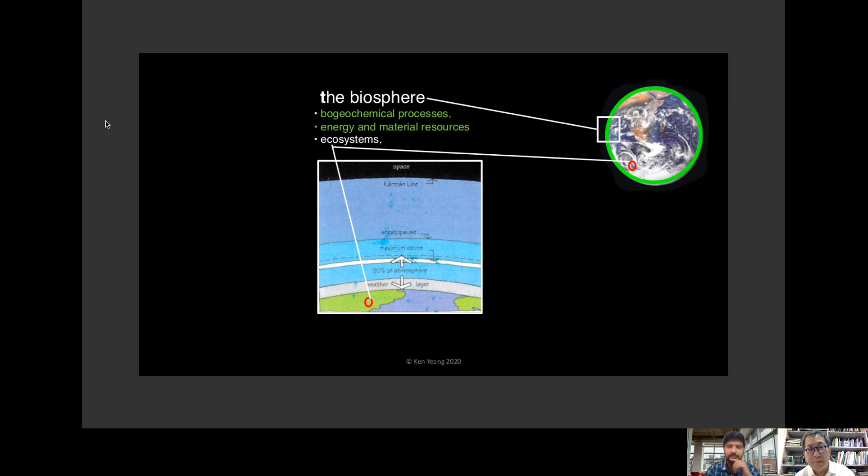Ecology sees the Earth as covered by a thin film called the biosphere. Within the biosphere are ecosystems, which are units in nature. The ecosystem consists of communities of plants and animals and the physical environment - so the community of plants, animals, and microbes.

And then the physical environment is a site characterized by given climatic factors and features, and its geology and its edaphic factors, or its soil. So the ecosystem consists of biological constituents and physical constituents acting together to form a whole.

Now, within the biotic constituents are human beings and our communities. And then there is the physical environment of which we make things - this is our built environment. As human beings, and as one of the species in nature, we make more things than any other species in nature. We will cover almost, at least a significant portion, of the planet with our built environment.

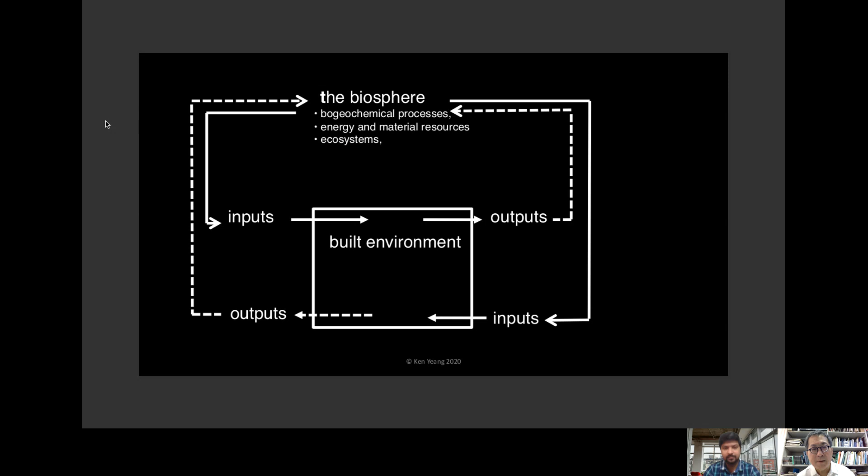If you look at it more comprehensively, inputs consist of energy, water, materials, food, and people, as well as their transportation. The built environment has impact when they make it, an impact when you use it, and an impact at the end of its useful life. Outputs are energy, emissions, materials, waste, people, and the built system itself. And now everything goes into the biosphere.

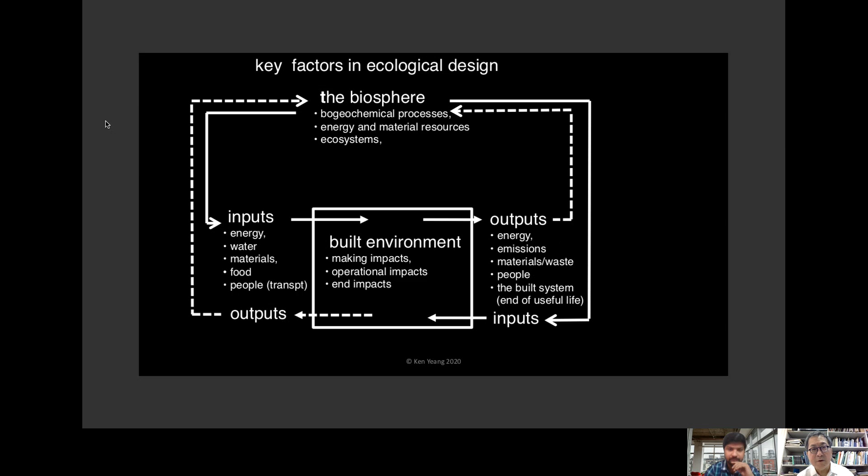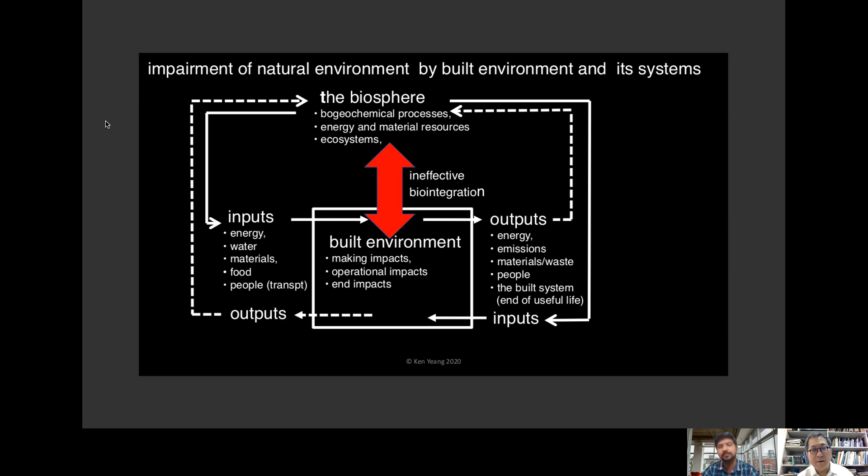It is the ineffective integration of our built environment with the biosphere that's the cause of the current state of environmental impairment. Because of this, for example, the gases we emit from the production of energy go into the air and pollute it; they're not integrated into the atmosphere, and this is the cause of pollution.

In many ways, I see what we do as architects similar to what doctors do in the design of prosthetic devices. A prosthetic device is an artificial object, like an arm, a heart, a leg, a kneecap, or even an eye, which is attached to a host organism. The success of the prosthetic device depends entirely on effective biointegration.

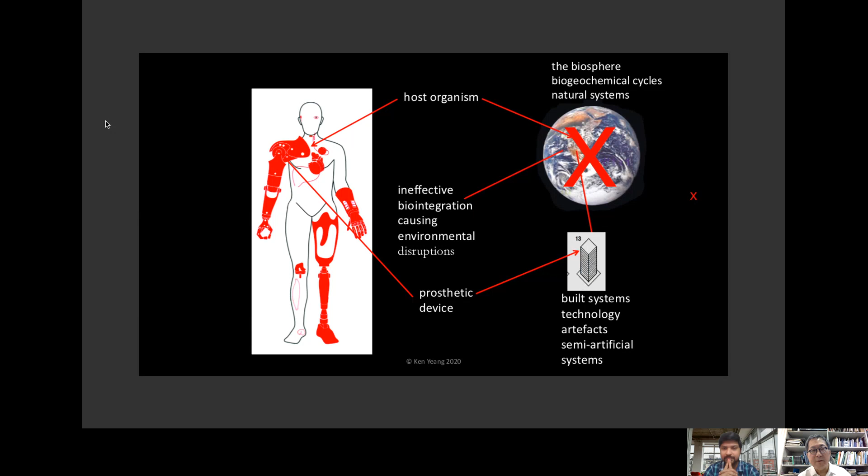If we draw the analogy, our built systems and technology artifacts are prosthetic devices because they're human-made, artificial, synthetic. Our equivalent host organism is the biosphere, its biogeochemical cycles and natural systems. So everything depends on effective biointegration. If the biointegration is ineffective, that's the cause of environmental disruption. So in one single diagram, that's a summary of what we're trying to do: effectively biointegrate our built environment with the natural environment in a seamless and benign way.

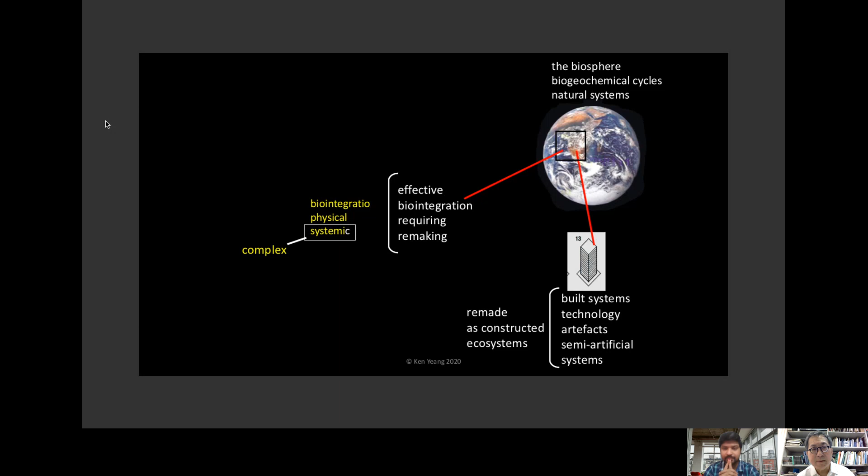Now, what does this mean? Biointegration, to me, has two aspects. One is physical and systemic. Physical biointegration is simple—it's just placing it and joining it together. But systemic is the more complex one.

So what I'm trying to do in our work is see whether we can create hybrid ecosystems by imitating and emulating the attributes of ecosystems. One of the first things we try to do is list down the ecosystem attributes that we need to emulate and replicate.

The ecosystem attributes include biological structure, biodiversity in ecosystems, connectivity in ecosystems, the provision of ecosystem services, biointegration in ecosystems. Ecosystems respond to climate, use and recycle materials, produce pure water and bring it back to the ground. The species are symbiotic, there's homeostasis—a feedback system within the ecosystem—and ecosystems produce their own food and succeed over a period of time.

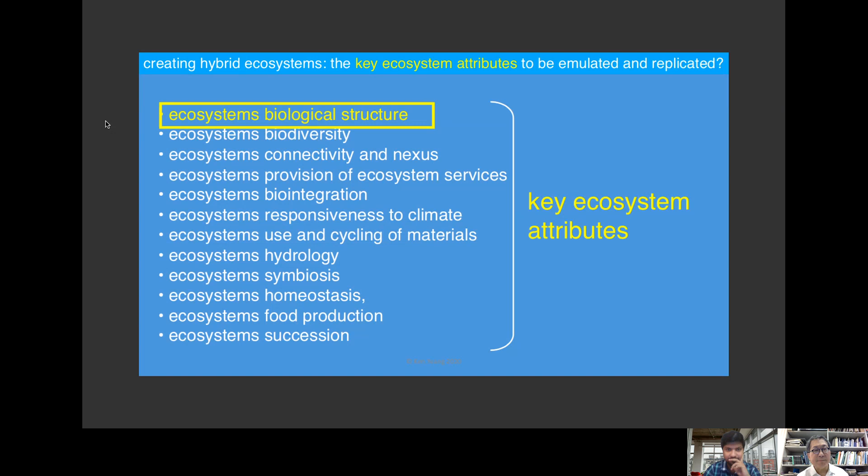So our work starts with how we can emulate and replicate these attributes. The first thing we did was look at ecosystem biological structure. This was the diagram I showed earlier, that the ecosystem consists of biotic and abiotic constituents.

But what you find if you look around you in Mumbai, for example, is that the environment and buildings you're in are mostly abiotic—it's hard, it's masonry, it's concrete. So where are the biotic constituents? This is what differentiates our built environment from ecosystems in nature, because nature has a complement of both biotic and abiotic.

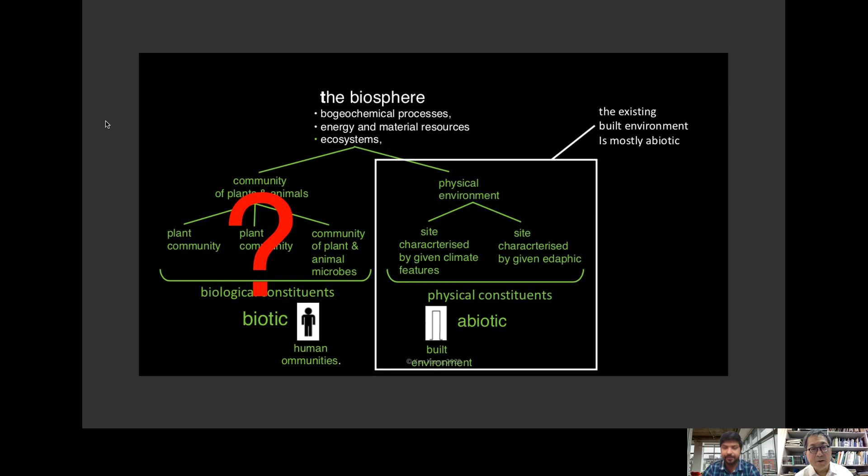This is a very important factor, because once you consider it, if you want your buildings to be like ecosystems, they should have their complement of biotic constituents. So our work starts with: how can we bring biotic constituents into the built environment?

I've done four diagrams here. The first is to put it all in one location, as you can see in Central Park. You can have a spotty relationship, as in the second diagram, as in Georgian London, where you have a series of green squares—Euston Square, Bedford Square, Tavistock Square, Russell Square, and so forth. Or you can have a stepping stone relationship.

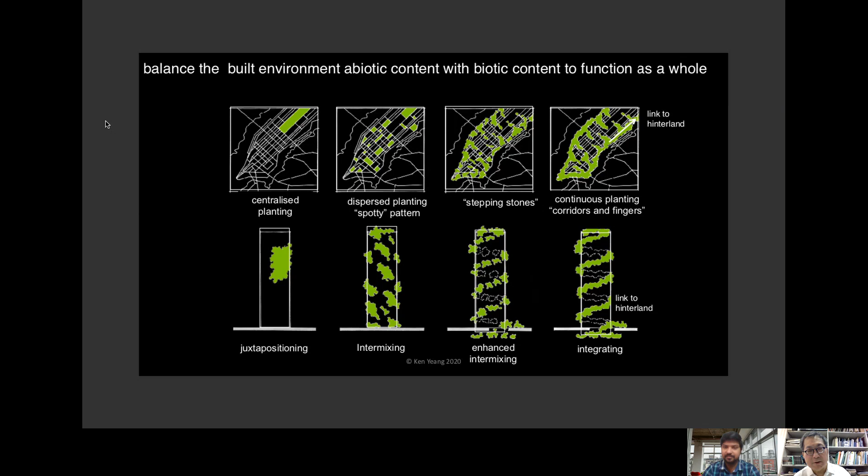That means you have green patches close to each other, like a stepping stone, but not exactly connected. The last diagram is the preferred one, because all the green areas are connected—I have green corridors and green fingers that eat into the built environment. By being continuous, this enables species migration and species interaction. By being connected, you have a greater pool of natural resources shared among species. So in ecological design, this is the preferred pattern: continuous planting.

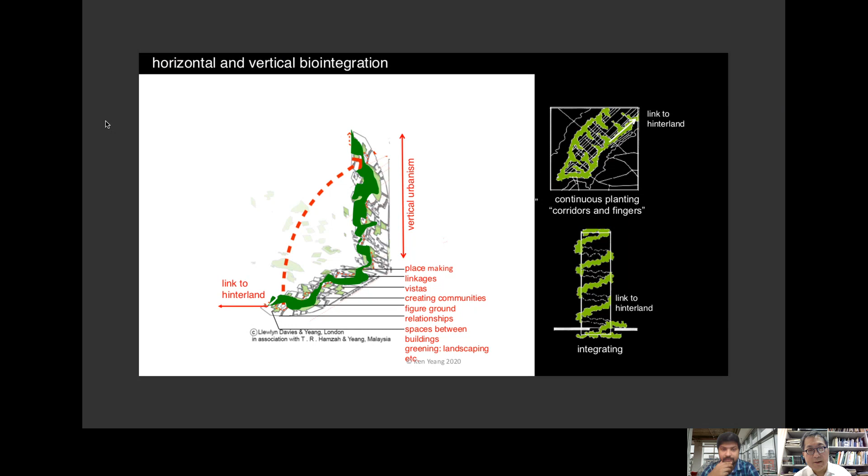Now, continuous planting is not just at the ground plane. We should try to link it as much as possible, but we should link from the ground vertically into the built system, like this. So this is my idea of the green city—it starts with biointegration of biotic constituents, the greenery, with the abiotic, the physical environment.

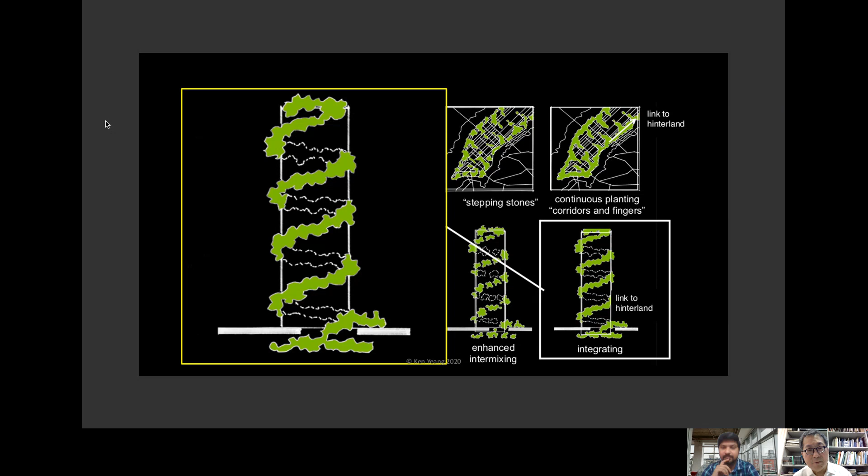This must be done carefully—not just using any species. The species must not be invasive, because invasive species could affect the ecology of the locality. So I started to experiment with this and see how we can bring it into the building, not just in a sporadic fashion, but bring it all the way down to the ground and to the basement as well, as much as we can.

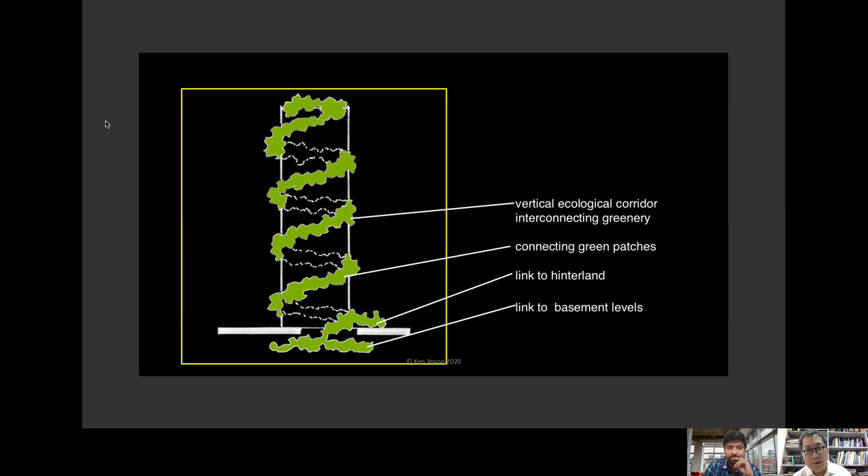And so these are the key factors in balancing the biotic with the abiotic: vertical ecological corridors, interconnected greenery, connecting green patches within the city and green within the building, which we link to the hinterland and we link to the basement levels.

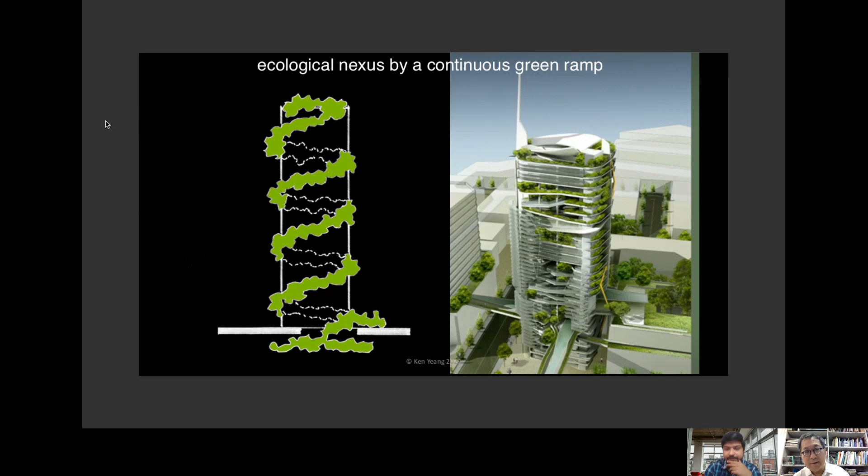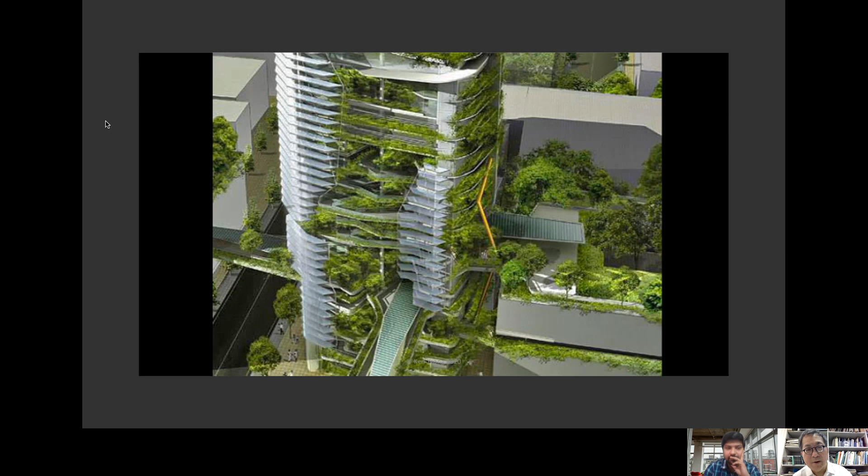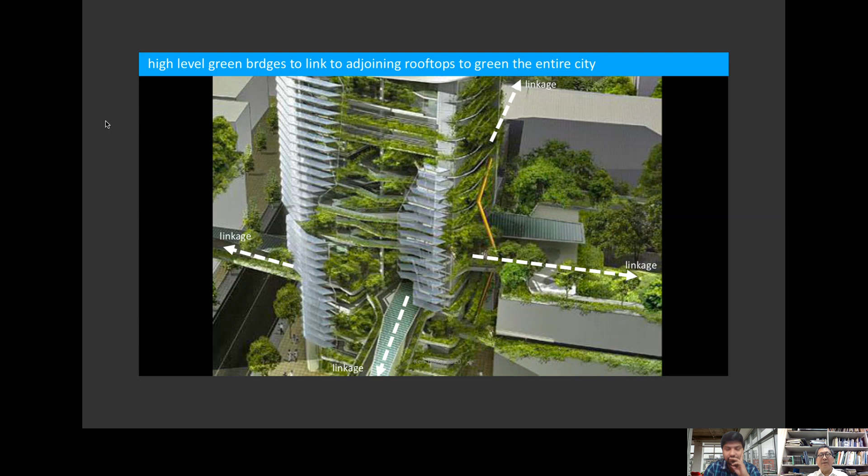The idea was that whenever the greenery reaches the same level as the adjoining building and the roof level, we should try and bridge across it and then extend the greenery into the roof. So in this way, our building becomes a catalyst, a device for slowly greening the entire city. This is just an idea that we had for doing it.

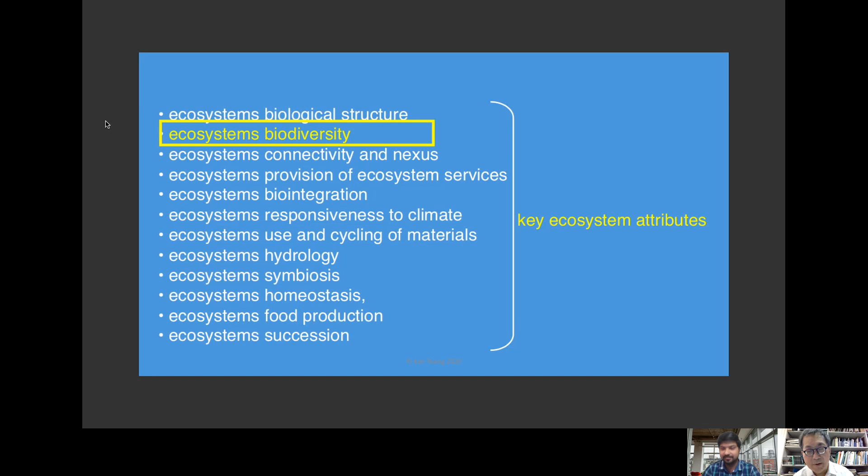Now, the next ecosystem attribute is ecosystem biodiversity. Ecosystems don't consist of just one species. If you look into the building and room that you're in, all you have is yourself, human beings, as the primary species, and then the other species are the rats and the creatures and the cockroaches and the microbiotic life in the environment that you're in. Now, how do you enhance the biodiversity?

Our approach is to see that whenever we design, we try and create habitats within the built environment at the ground plane. The habitats could be, as you can see on the right-hand side, green roofs, vertical greening, green sky courts, green atriums, a constructed wetland, detention ponds, bioswales and green areas on the ground. And then there should be green links to the hinterland, and also, when it goes down to the ground, we call it the Ecocell.

This building was completed about 3 years ago, and it's quite a big building. It was basically 2 buildings, which are almost symmetrical, and they lie in between. There's a boulevard, linked in an axis from the plaza at the north all the way down to the monument on the south. So the second bar that you can see, the upper diagrams, are the different areas where we create habitats: the ground plane, the terraces, the walls, and so forth.

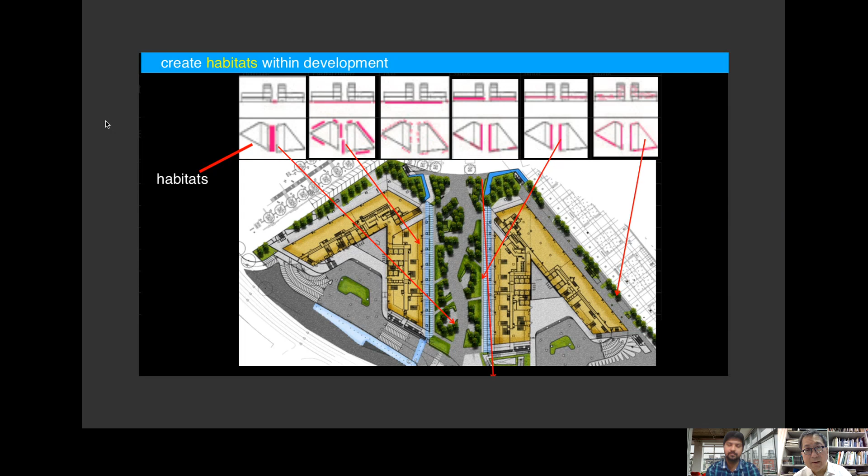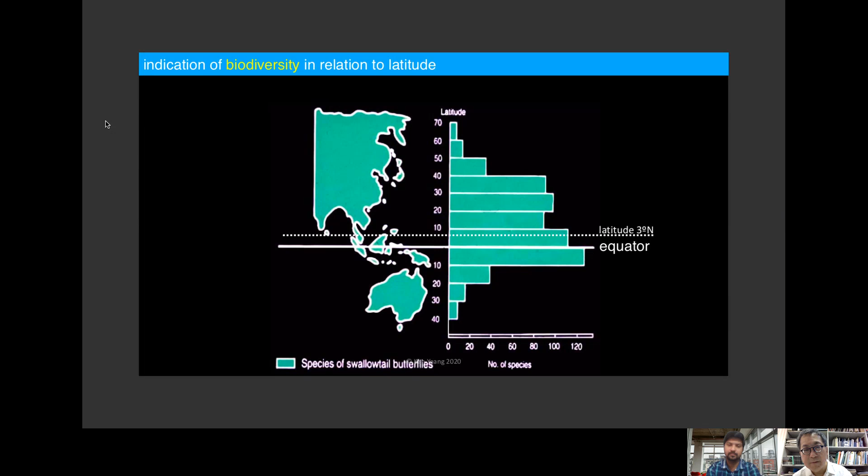Having established habitats in our design, we start to look at the biodiversity, and this site is about 3 degrees above the equator. As you can see, it's fairly biodiverse. We started to prepare what we call a biodiversity matrix, which is this matrix on the left-hand side. On the first column, we have the species that we want to bring back into locality, species of fauna that we want to bring back.

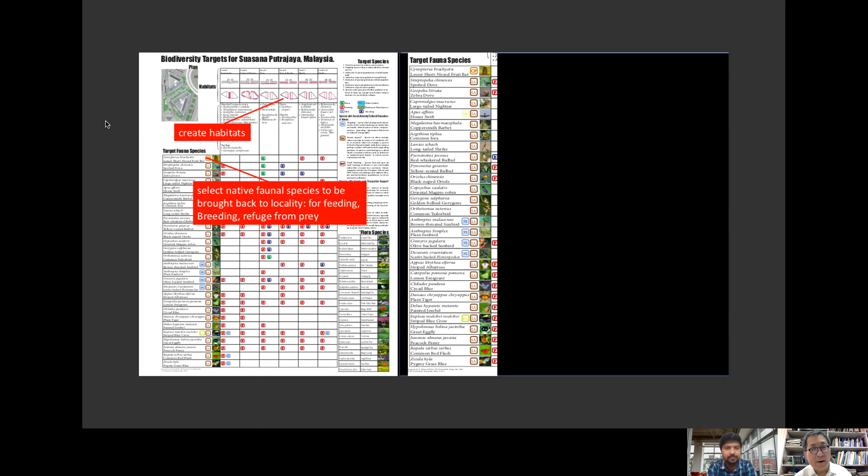And then the top bar are the habitats, and we see how they interact with each other, whether it's for feeding or breeding or for refuge from prey. Then from there, we identify floral species that will attract the fauna. So what we have is a matrix of habitats, flora, and fauna. We use this as a basis of designing the landscaping and the habitats for the development, so the whole development then becomes a biodiverse development, where we try and balance the biotic with the abiotic.

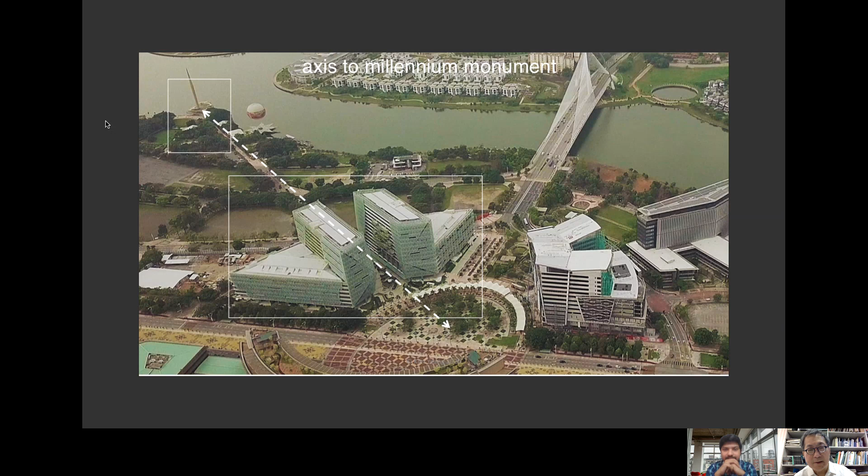So you can see the 2 V-shaped buildings, and they sit on this piece of land, which is about 3 acres, between the plaza in the center, and then going down on the far left to the monument by the waterfront, which is also designed by us. In the middle is the bridge, and the right-hand side leads to Prime Minister's residence. Here it is, you can see the 2 buildings, and you can see the square and the monument, which is on the right-hand side, next to opposite the Ministry of Finance buildings.

This is the space in between the 2 buildings. It's a seating area for people. We intend to make this into a space which is a lively place for people. And then off this, below the towers, are canopy spaces which we hope to have restaurants and bars and food and beverage outlets.

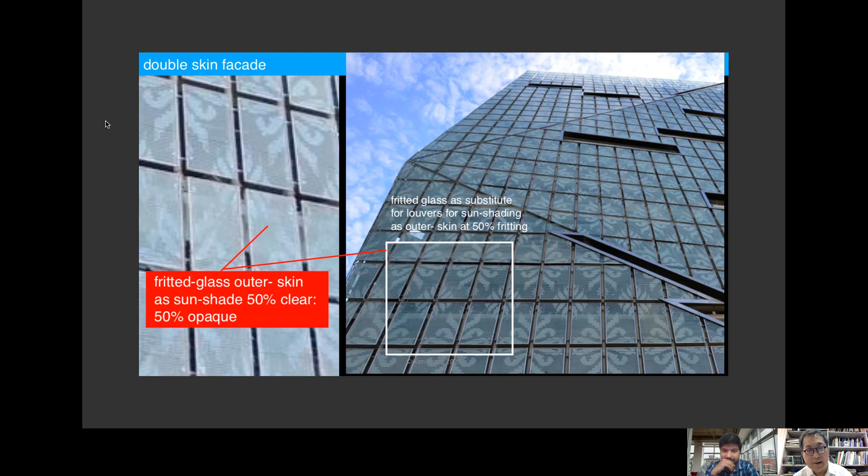What is unique about this building is this double skin. The conventional way of treating sun shading is to have horizontal louvers, but we wanted to do something besides that, so we experimented with fritted glass, which has a fritted pattern on it. It's not exactly butt jointed, it's spaced a little further apart, and the fritting is about 50%. There are two skins, an outer skin and an inner skin.

We wanted to see how effective it is as sun shading. The building energy intensity is 136.18 kilowatt hours per square meter per annum, whereas a typical office building uses 210 kilowatt hours per square meter per annum. So by all means and purposes, this is an effective, low energy building. These figures show that the fritted glass and sun shading works.

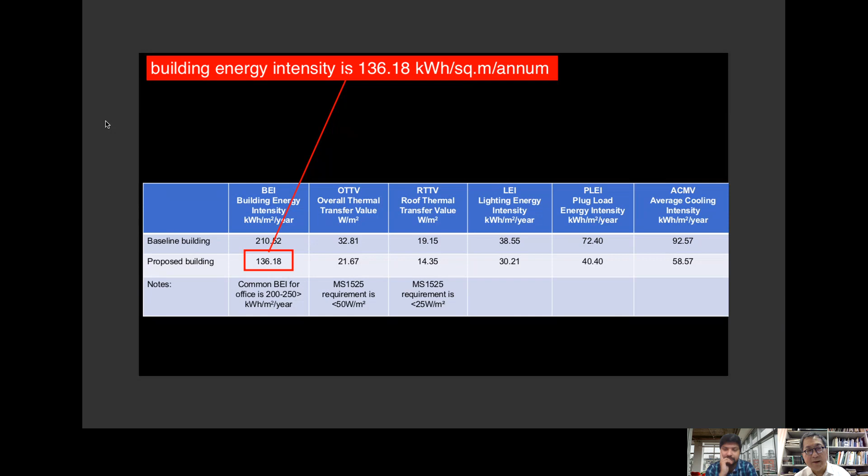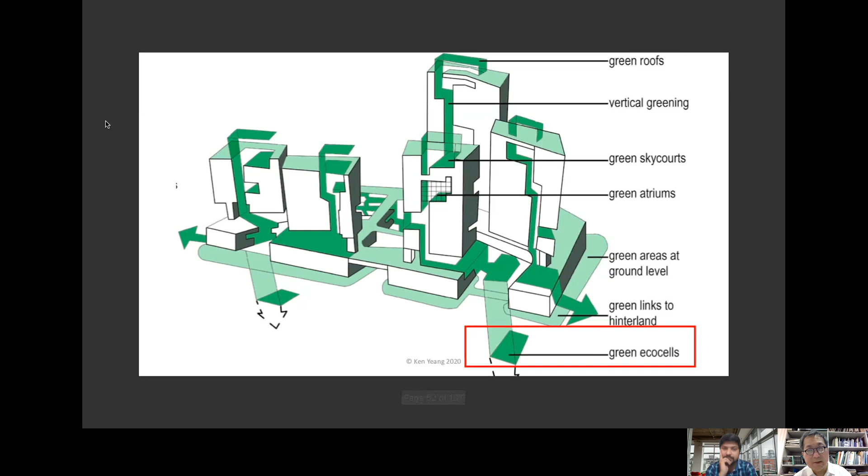This time we brought all the greenery all the way down to the basement, and we call this an Ecocell. This is the master plan we did a few years back for the Kowloon waterfront, with Ecocells on the podium that cut all the way down into the basement. It provides vertical integration for the greenery, opportunities for rainwater harvesting, brings natural ventilation and daylight into the lower areas, and you can have an eco machine at the bottom, or a bioswale, used for treating sewage and waste. So I call this an Ecocell.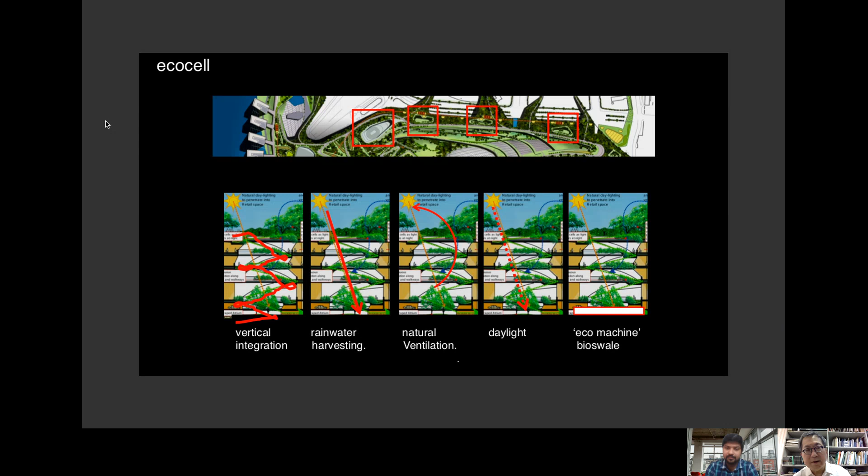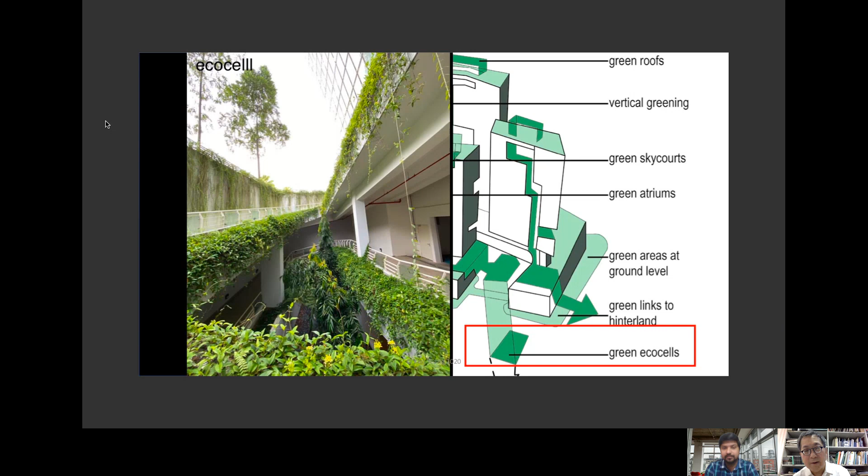This is the device we have in the buildings. For this particular project, you can see the planting going all the way around from the third level, spiraling all down to the ground and down to the basement. This is the Ecocell.

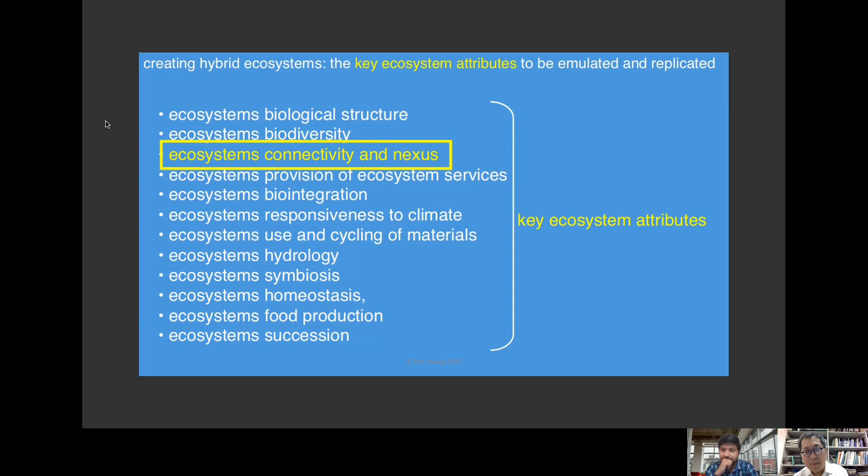Nature is totally interconnected, and sometimes not just physically, but also by the air and the water, even though these are not immediately apparent to all of us. One of the things we try to do is reconnect nature, because what human beings do is fragment nature - whenever we go on a site, we cut it up with roads, drains and sewerage, and we should try to reconnect it.

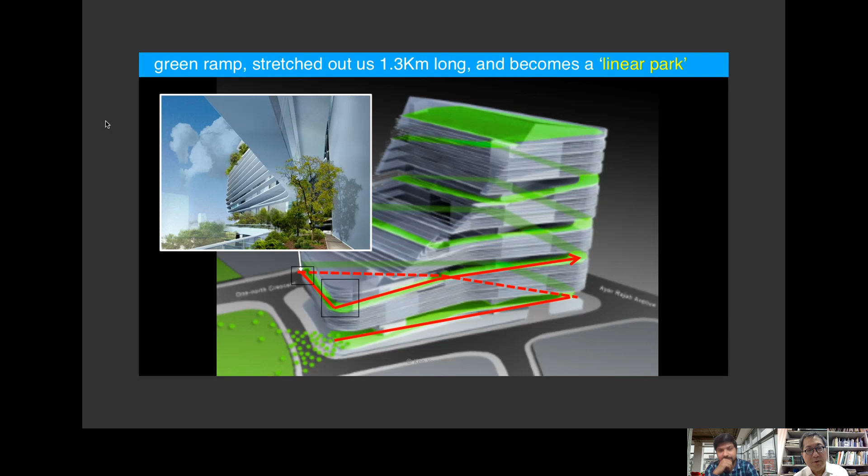In this scheme, we try to reconnect the green areas in this building by this ramp. On the left-hand side is the inspirational drawing showing the greenery following the ramp all the way up. Next to it we have a walkway, which enables you to service the greenery without going through the building. This is a detail of what it looks like - you can see the walkway, the vegetation on the left-hand side, and the sun shading on top.

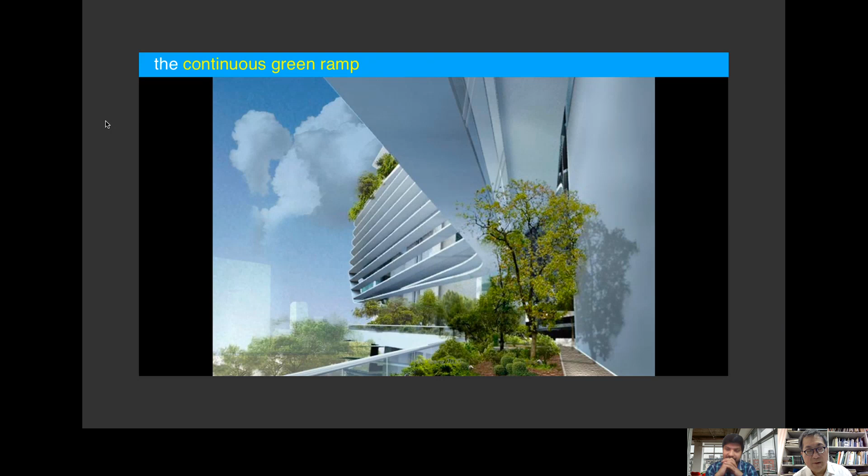By now it should be evident that all our projects are experiments. They're not 100% perfect - they're an aspiration of what an ideal built environment could be, with linked greenery and walkways on the outside. Eventually we got this built back in 2006, and here you can see the walkway, people walking, the planting, and the sun shading on top.

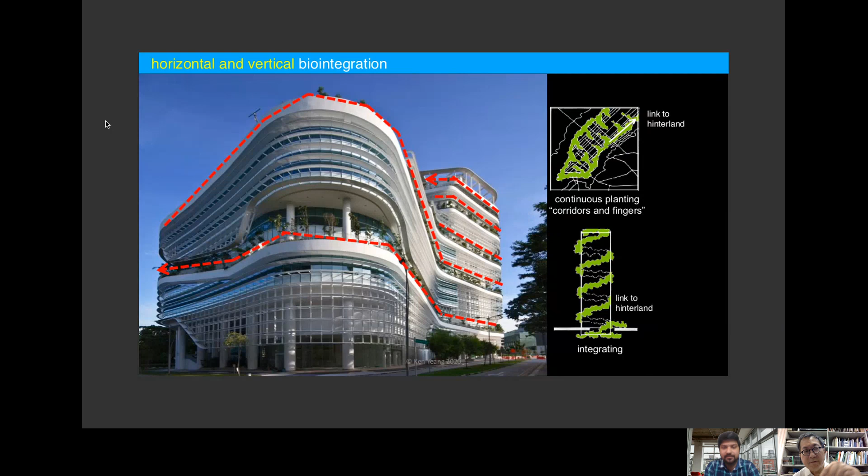With every facade, we climb up one floor, so eventually the vegetation spirals all the way up to the top of the building. You can see the ramp, which has vegetation on one side and a walkway, and at the corners we open out into sky courts.

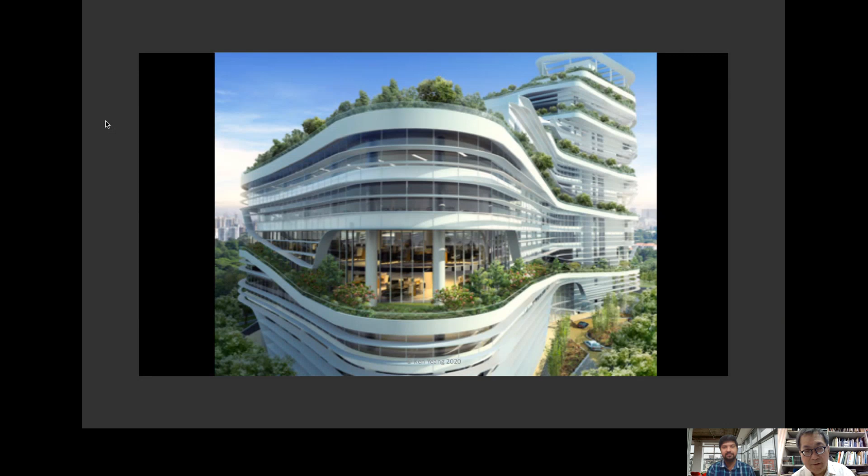We have a mid-level garden and a garden on top, and then at the far corner we have what we call sky courts, which provide transitional spaces between the inside and the outside. So people from the inside can integrate or interface with people along the walkway. We call the walkway a linear park because it extends about 1.3 kilometers long when stretched out.

This is what one of the terraces looks like from the corner, and then we have a mid-level garden. From the mid-level garden, we have a roof garden at the top, which gives a panoramic view of the entire surrounding.

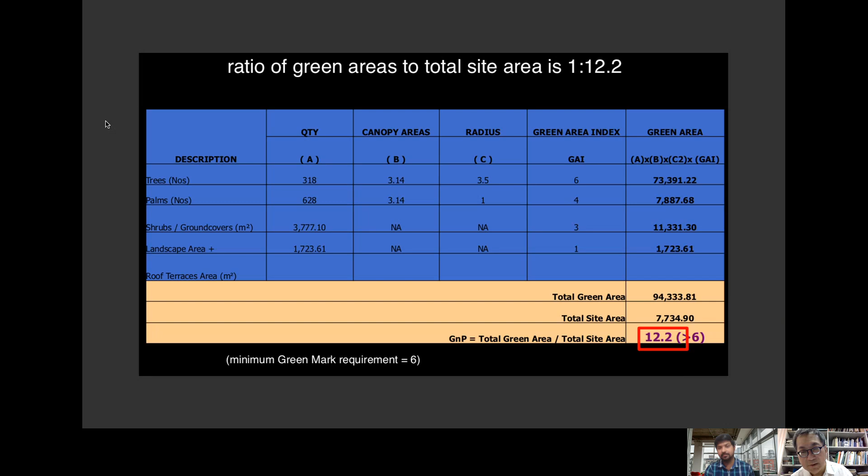Now, the green area ratio to get the green mark accreditation has to be more than 6. But for this project, because of the green ramp, we've exceeded 6 — we got 12.2 green area.

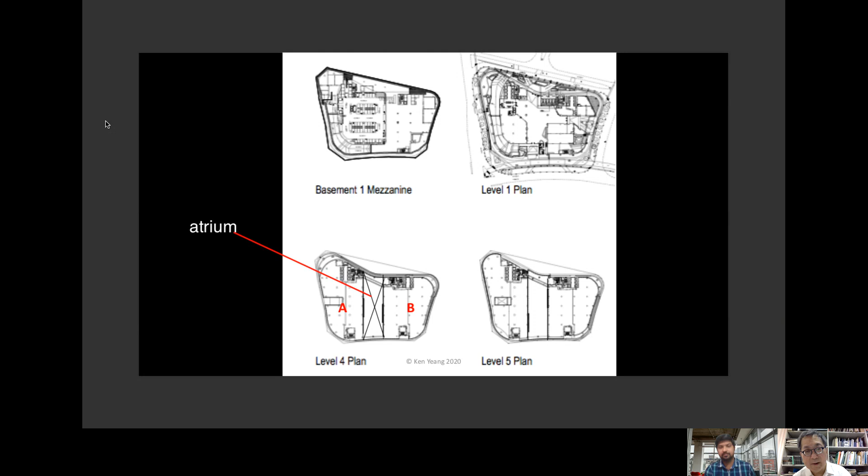Between the buildings is an atrium, and the atrium opens out into basically 2 blocks linked by a bridge. On top of the atrium we have louvers which are open, so on a normal day these louvers are open to let the wind and air through, so we didn't need to fully air condition the atrium. In inclement weather, when there's rain, the louvers automatically shut.

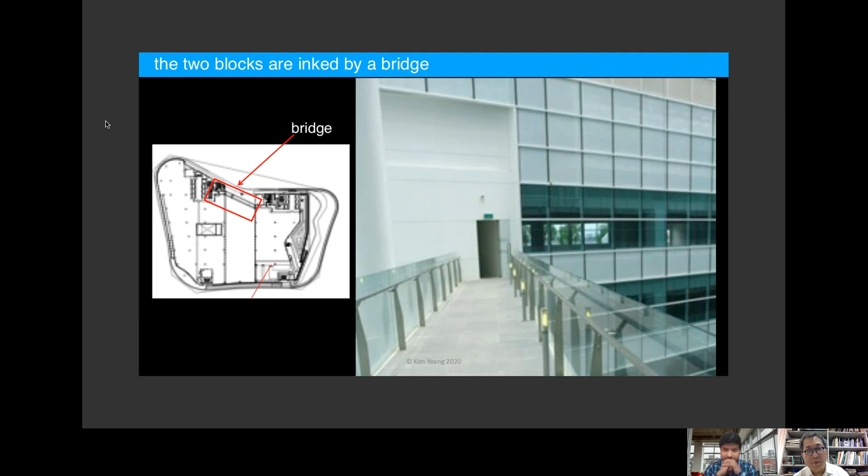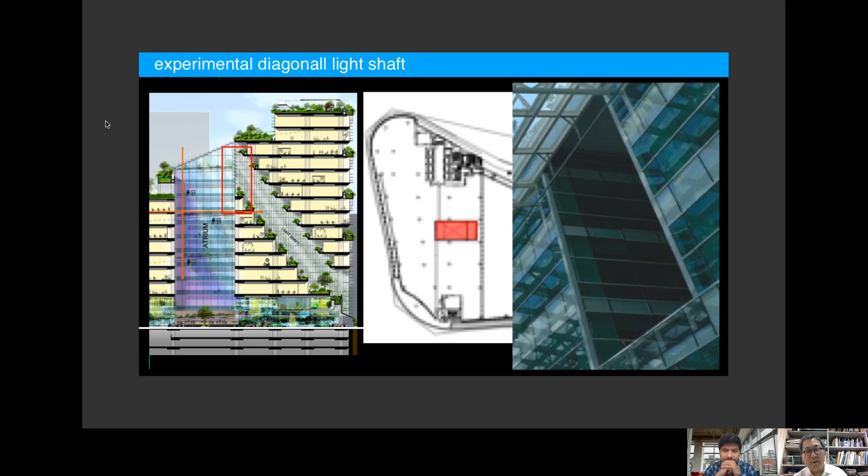So the bridges link the 2 buildings. Here is one of the bridges, and one of the experiments we created is what I call a diagonal light shaft that goes all the way up from the street level to the top of the building. On the right-hand side you see how it opens out into the atrium. This is looking up from the ground floor, and this is looking down from the upper floor into the street.

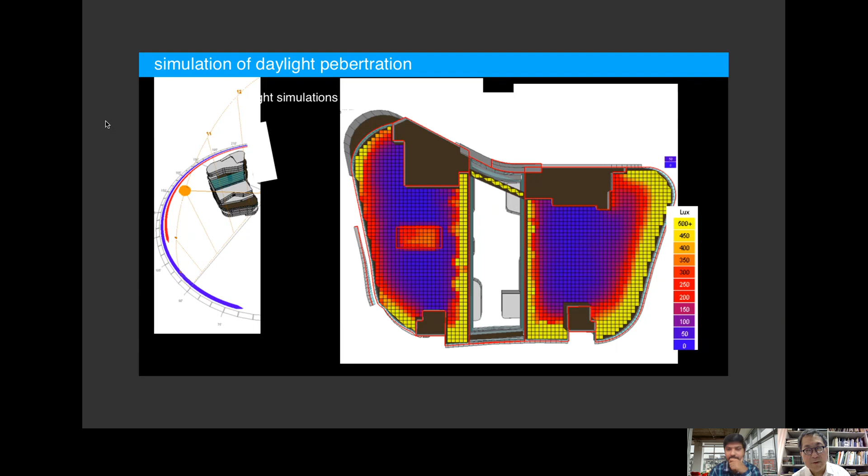In Germany, the distance between glass to glass is about 15 to 17 meters, and here we've actually got more than 17 meters, especially on the right-hand side block. But daylight comes in at the edge, so the yellow color shows the daylight entering the building. The Ecocell, the diagonal light shaft in the middle of the left block, brings some daylight into the middle of the building.

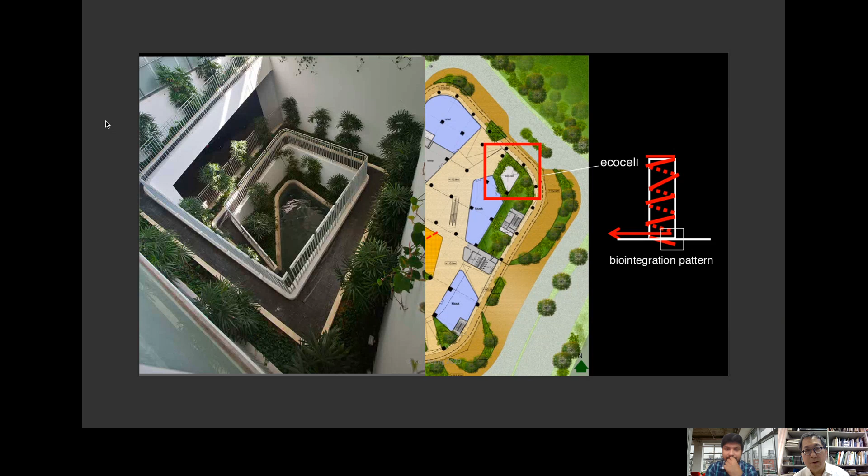From the Ecocell, we have vegetation that goes all the way up, climbing every floor with this ramp, and it ends in the Ecocell, as in the previous building. The vegetation weaves all the way down to the ground. On the right-hand side is a diagram that shows how it works: the vegetation starts from the Ecocell, weaves its way up to the top, to the mid-level garden, and to the top of the building.

Now, how do we create habitats in a high-rise built form? This is the building that is under construction now, an apartment building, and what we have is a green wall that starts from the ground, going all the way to the top.

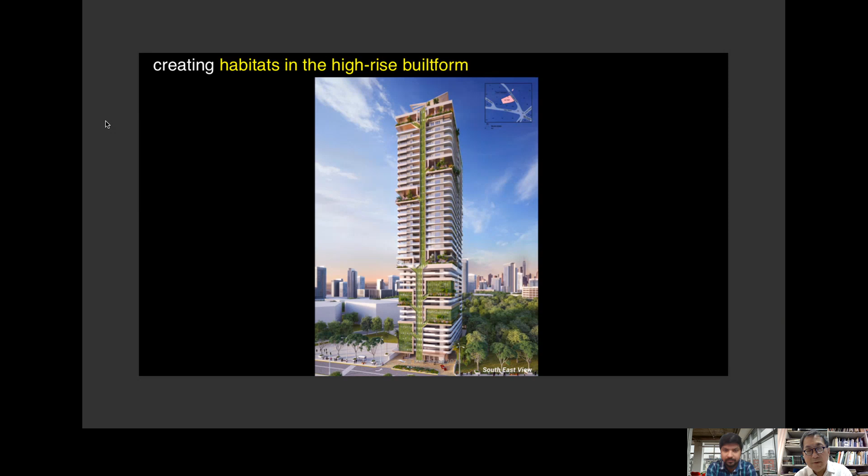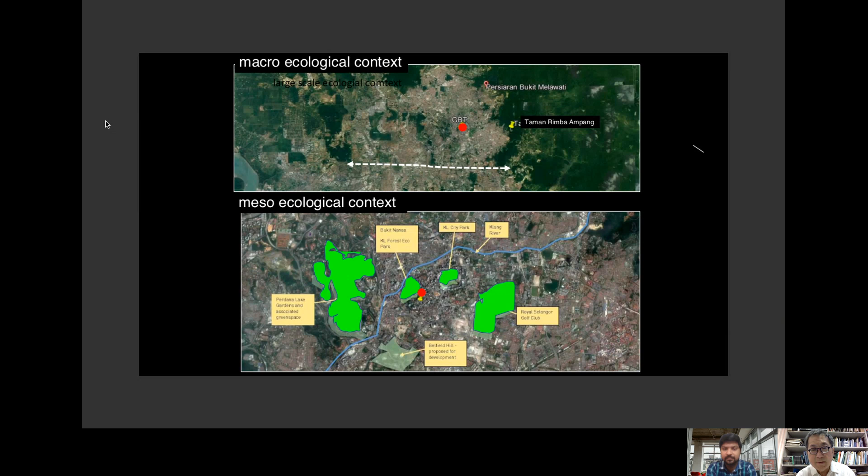We start the design by looking at the surrounding areas — what greening do we have, which species are around the area — and we try to bring species back into the site, which has been fragmented and simplified by human beings.

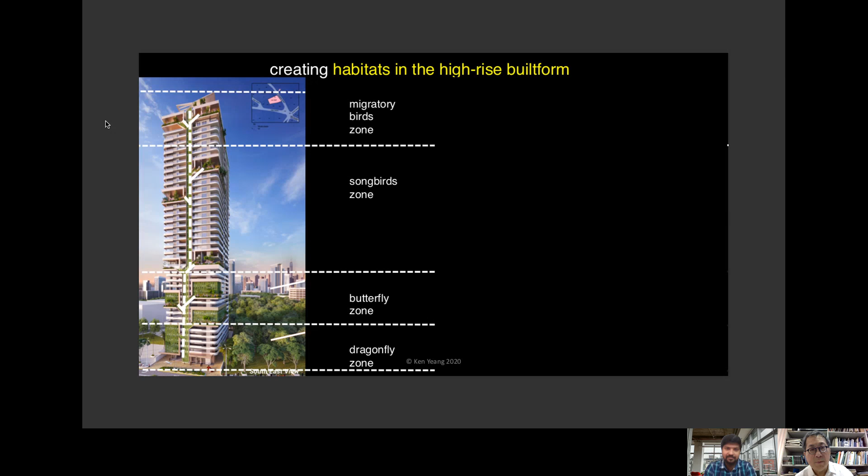As I mentioned earlier, we try to create habitats within the building, and then we stratify the habitats. For a vertical building, for the lower part of the site we have the dragonfly zone, for the middle part we call it the butterfly zone, then the songbird zone, and the upper part is the migratory bird zone. These are the different stratifications.

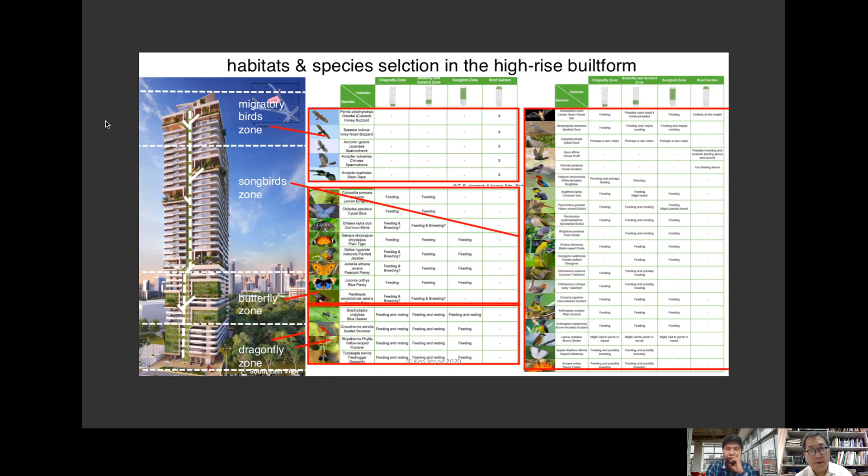This is the biodiversity matrix for a vertical building. You can see the migratory birds and songbirds that we want to bring into the site, and so forth.

Now, this property of the ecosystem is called the provision of ecosystem services. That's probably the most important ecosystem attribute that we should try to emulate and replicate.

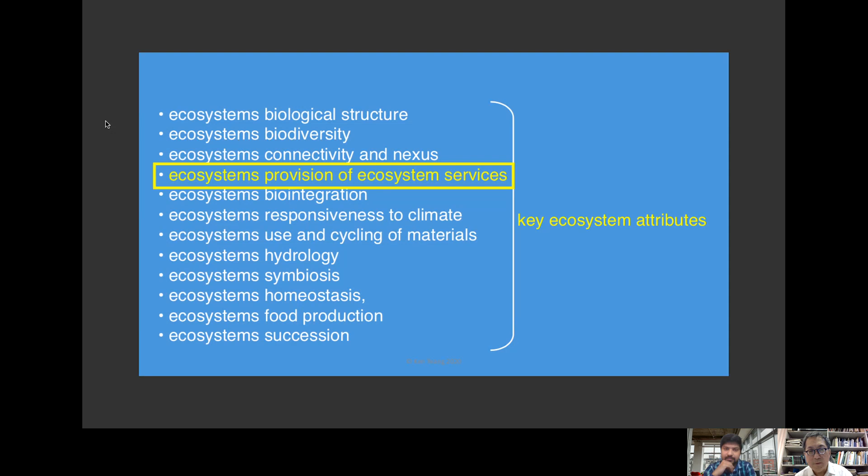Now, what is ecosystem services? Ecosystem services are services that nature provides for us as human beings without human intervention. Nature does it for free, without us telling nature to do it. These are some of the things that nature does for us: it produces oxygen, it maintains biological and genetic biodiversity, and so on — that's the whole list of things that nature does for us.

In principle, we should try and emulate and replicate this. But then it became clear that it is almost impossible for us to do this, because there's no way we can produce enough oxygen for the entire planet, or the genetic diversity, or purification of water and air. So how do we do this? Even with the best technology and the best sources of energy, it is totally impossible, because nature does it in such a clever way.

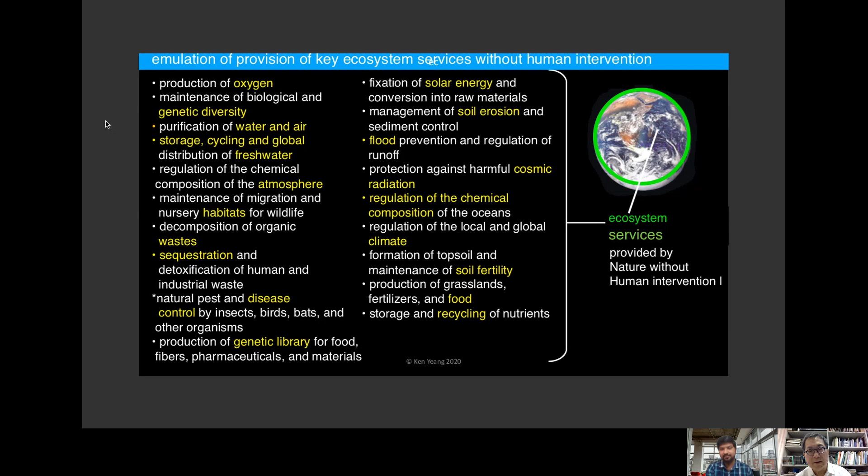Nature produces oxygen from photosynthesis. The emissions from our energy production systems are assimilated by nature. It's impossible for us to simulate everything, because everything in nature is connected, and this is something I mentioned earlier on.

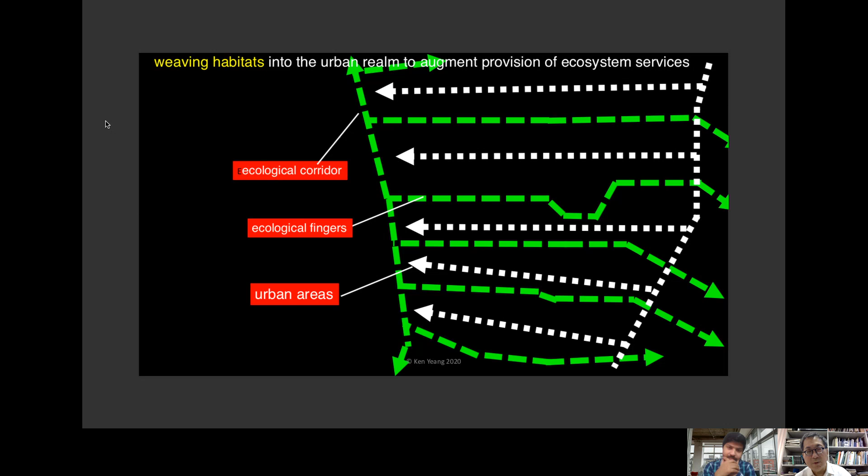So my idea then was, what happens if we bring nature not just as squares like in Georgian London, but as a series of fingers that eat into the city, weaving the green areas and the urban areas like two clasped hands, so that the nature woven into the built environment can provide ecosystem services to the urban areas.

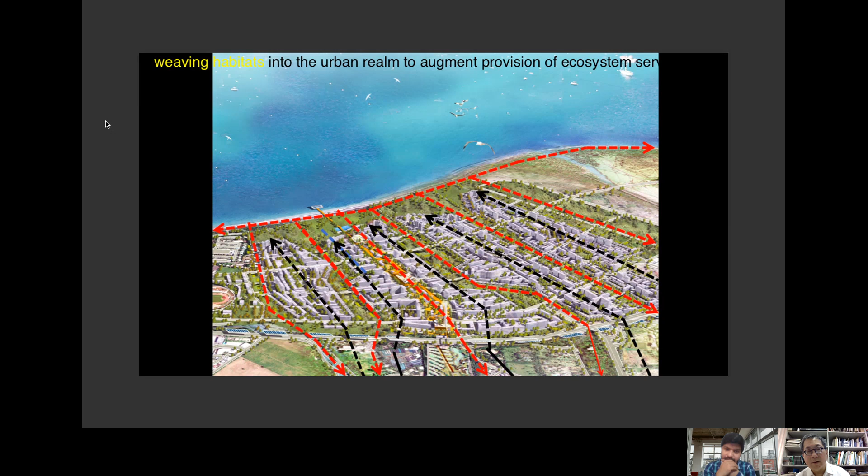This site is by the sea, so we have a spine that collects all the species, and then a series of fingers going up into the land. From the land, the black color shows the urban areas, which weaves out into the red areas. We designed this with about 30 meters spacing between the green areas, and the green areas are about 20 meters wide. In this way, we're able to bring green areas into the built environment.

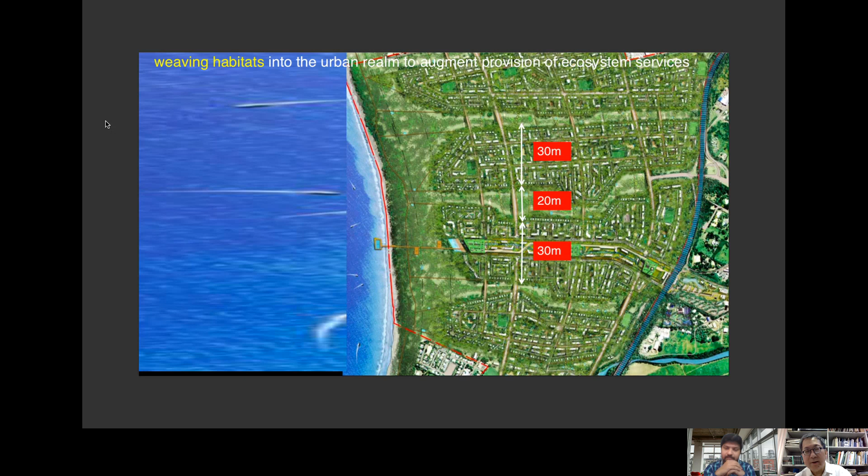But it's an idea, a way of interfacing the greenery and the built environment in a weaving pattern. By doing so, we enhance the ability to provide ecosystem services within the built environment. We call this augmenting nature—nature is augmented into our built environment to provide ecosystem services.

Of course, the edges should not be pristine, as you can see on the top right side. If you shape it so it's irregular, it gives spaces for species to hide and create their own homes. But if it's straight, it's not as effective.

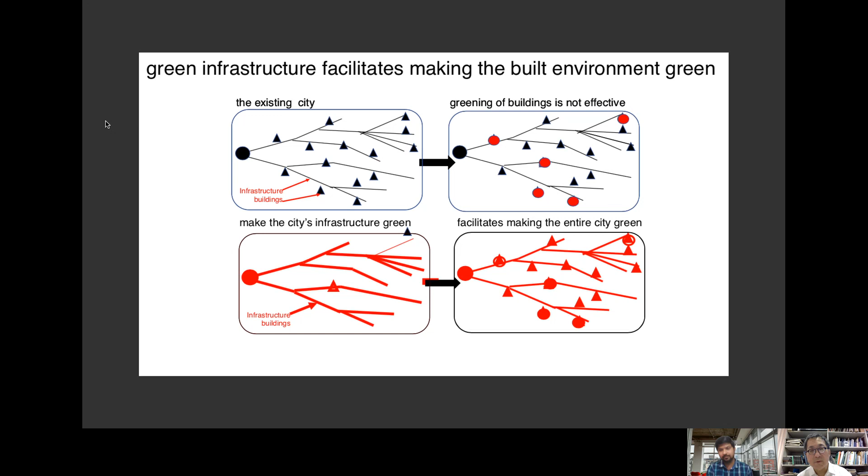So the challenge is: what happens if we start with the infrastructure? Then it's much easier for everything we build to become integrated as a whole. If I were to leave one thought in your mind, it's that we should start with infrastructure and make it green first, then do green buildings. But if you do it the other way around, as in this diagram, it's almost impossible—it will take years and years to change all the existing buildings to become green.

Now, what infrastructure do we need to biointegrate? The first is nature itself—we can regard nature as infrastructure, the ecosystems, the waterways, and so forth. Water itself is part of nature, but I single it out because the hydrology of a locality is extremely important—water is what life is all about. Without water, no species can survive. When astronomers look into the sky, at the moon or Mars, the first thing they look for is signs of water, because if there are signs of water, it means there's organic life.

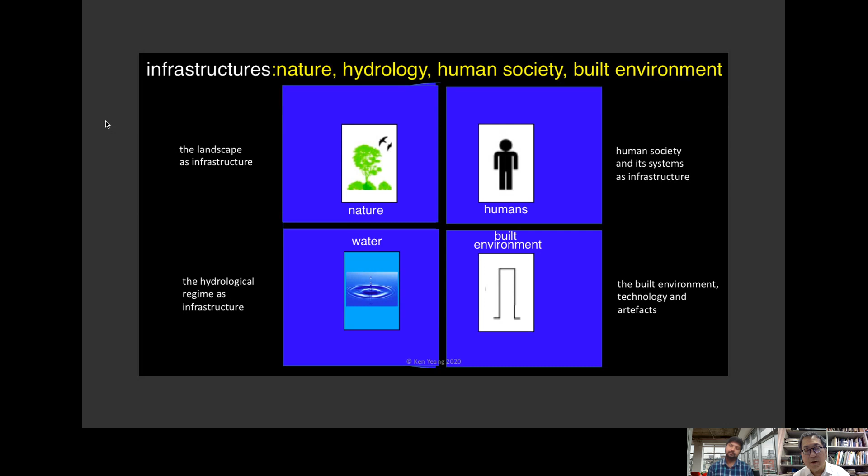The next infrastructure to consider is human society—not just human beings as a species, but our societal systems: economic, political, educational, institutional, manufacturing and transportation systems. This is the third infrastructure we need to consider in ecological design. Finally, there's the built environment, the enclosure of systems, the technology. Ecological design is how we bring all these together into a whole. Obviously this is easier said than done, but this is the principle of what ecological design is about.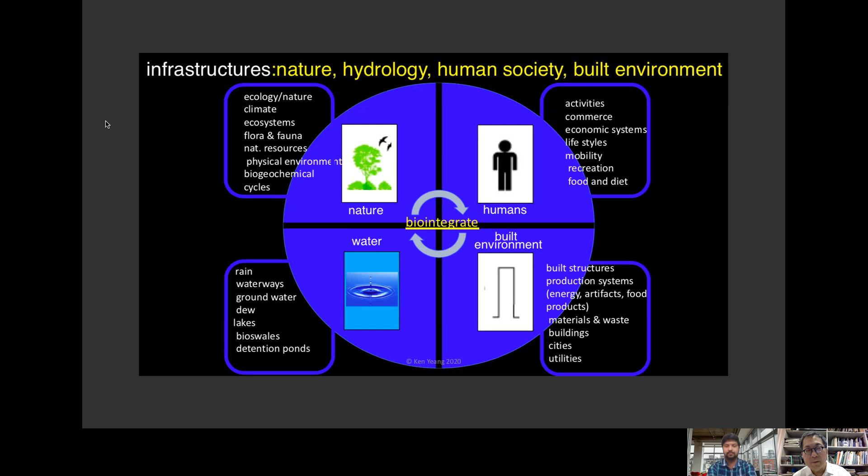Biointegration of these four infrastructures: the humans, the human society and systems, the built environment, everything that we make and do, and there's nature, and there is water.

To illustrate this, here's a project we did in Bangalore, a master plan. You can see it's right next to a green area. The first thing we did was to have a spine that collects all the green areas, then stretch it across the site so we can link the green from the far left to the far right side of the site, traversing across with green fingers.

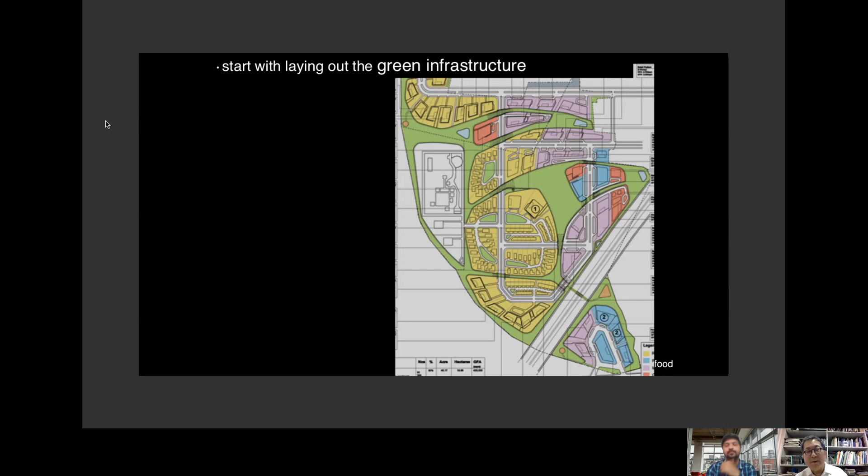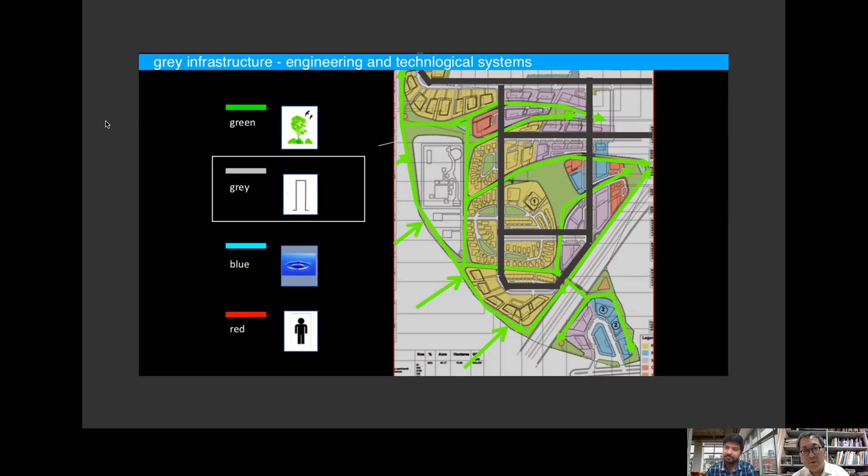This is the eventual master plan. You can see the green areas on the left-hand side, stretched across the site to the adjoining sites. This is the road system, and the road system has a bridge from the left-hand side to the right-hand side, going across the site to the adjoining building. This is the road structure, and this is the water which follows the road. In the composite of biointegration, you can see the water in blue, the road, the human society movement systems in the red dotted line, and the green representing the green fingers.

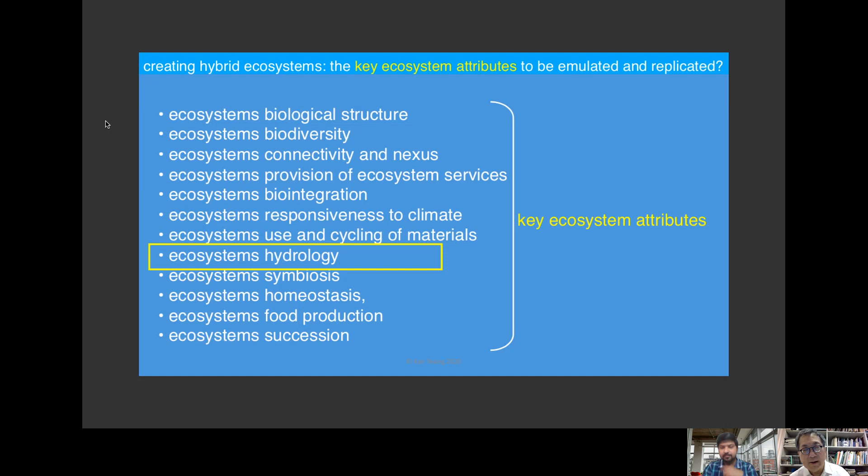It's a diagram of what we should try to do: within the built system itself, we should try to close the loop as much as we can. We should reuse water and recycle it, and things we cannot use, we dispose of to the outside. But on the outside, it means it goes into a constructed wetland, into a bioswale. Here's the diagram of the water within the built environment.

But when it goes outside, we should try to integrate it into the outside, so this is both the internal and external relationship between the water and the environment. On the right-hand side are some examples of how we can bring it back into the ground, whether through infiltration planters, permeable paving, infiltration bioswales, rain gardens, and storm water and wetland canals.

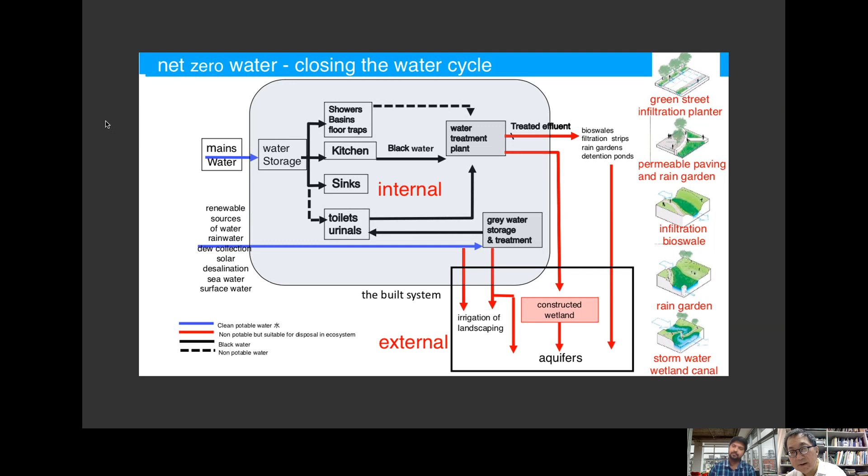For the black water, we should have it flow through a series of natural treatment processes and treatment areas, so that the water gets increasingly cleaner rather than being thrown away somewhere, but instead interconnected and brought close to each other.

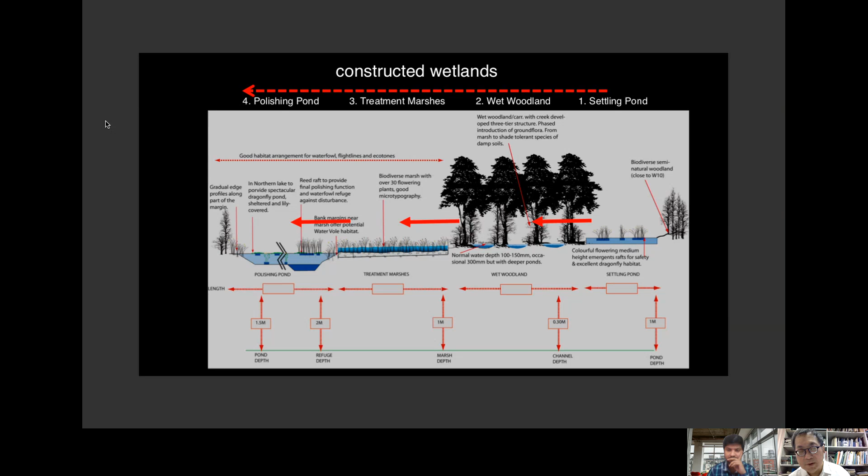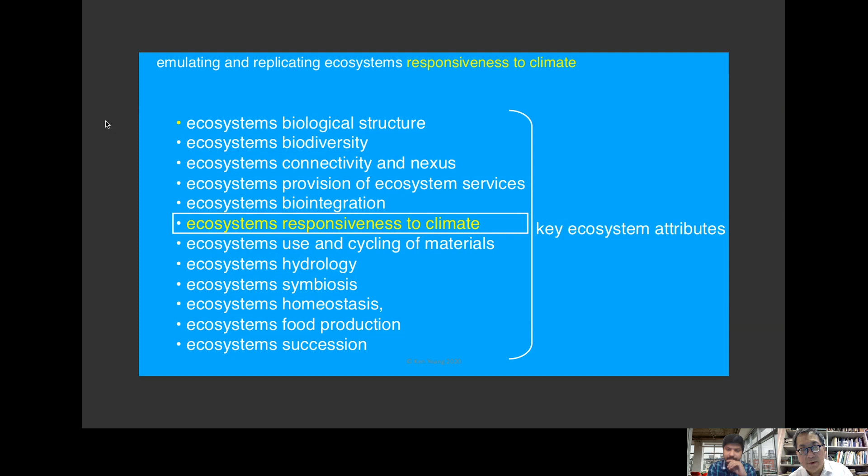Now, ecosystems respond to the climate. That means the ecosystem we have, let's say in the Northern Hemisphere like in the UK or in Beijing, is very different from the climate in the tropics, the hot humid tropics, or in the in-between areas. These are the different climatic zones within the planet. You can see the equator, then above the equator are the temperate climate zones, and finally the cold climate at the uppermost parts from the equator.

Now, in the temperate zone, you have basically four seasons: a very cold winter and a hot summer, but in between are the nice times of the year, which I call the mid-season, the spring and the autumn.

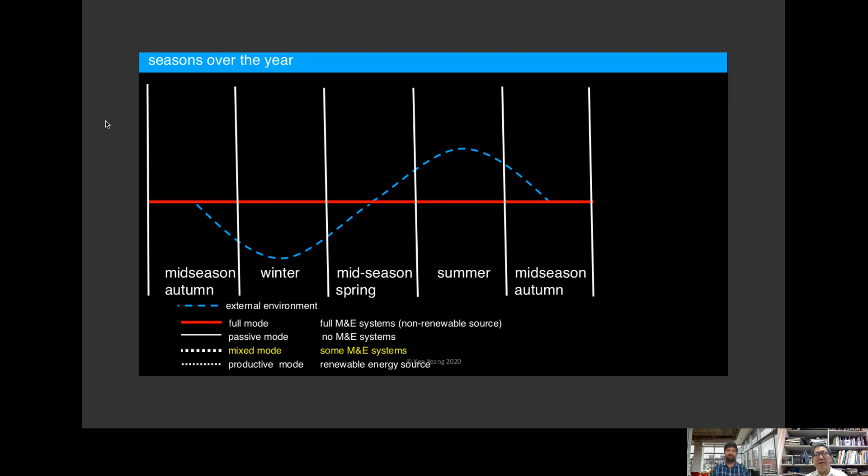The blue line indicates the comfort conditions in winter and summer, and the red line indicates what engineers do for us. They try to have consistent temperature, humidity, and air change throughout the whole year, which makes mechanical systems very high energy. We call this full mode, meaning it is 100% consistent temperature, humidity, and air change.

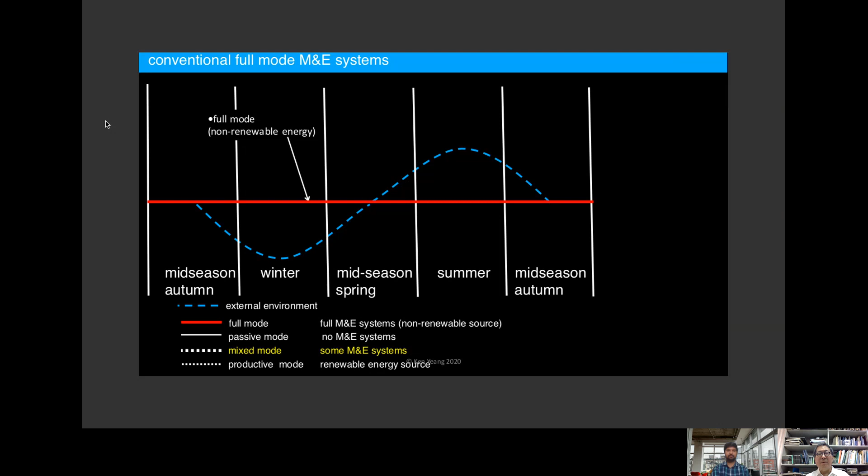Now, bioclimatic design means designing with the local climate. That means we can improve the comfort conditions in winter a little and improve the comfort conditions in summer a little through proper orientation, facade design, and the shape of the building. The different strategies are shown on the right-hand side.

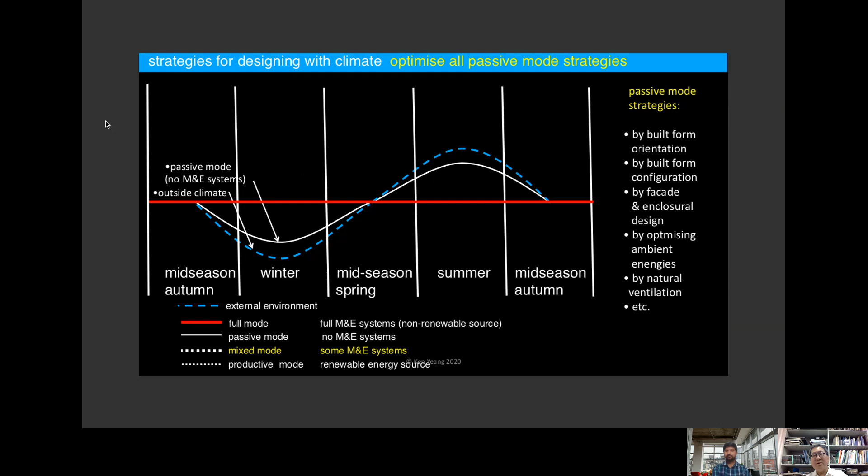Mixed mode means using some mechanical systems, such as ceiling fans or exhaust fans. Productive mode is where you start to use renewable sources of energy to try and generate your own energy.

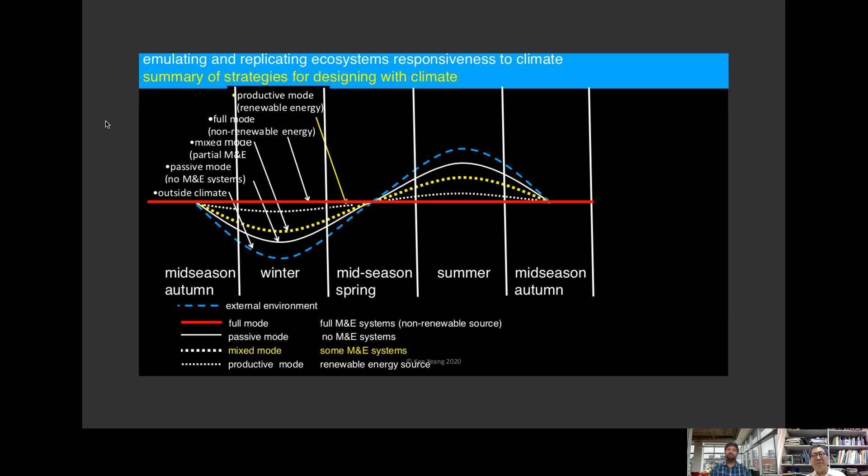But what is clear is that with all these low energy solutions, whether bioclimatic or renewable sources, you can never equate with the red line, which is the mechanical system. So it's not a 100% solution, but that's one of the ways of doing it.

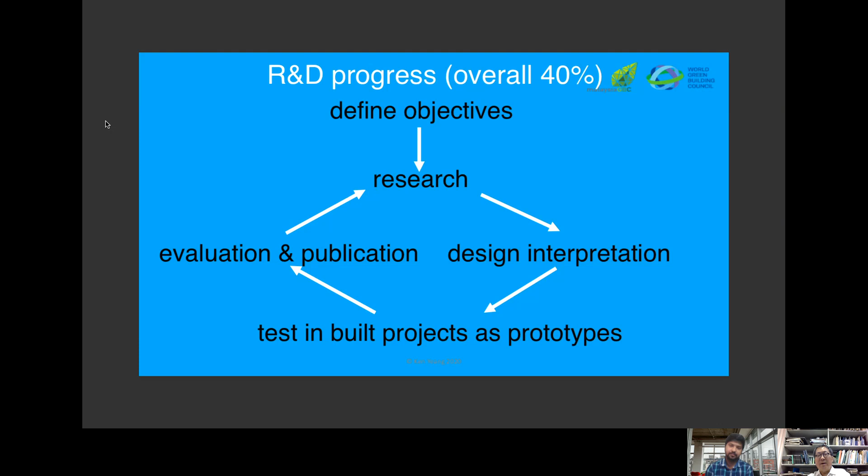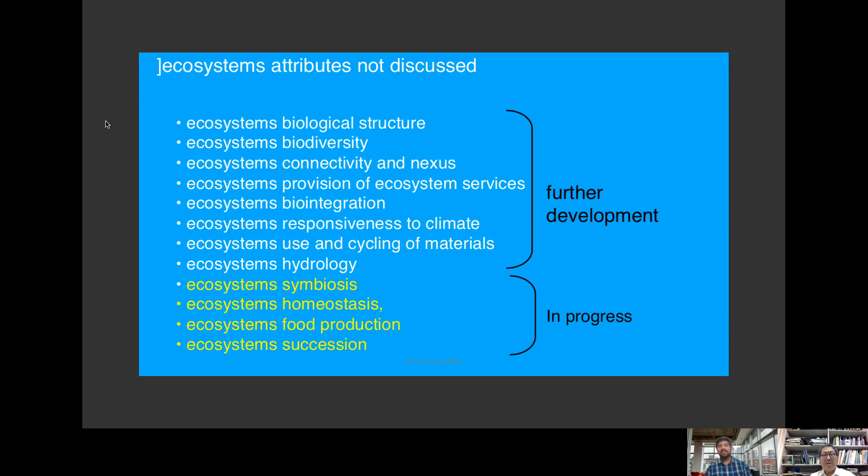Thank you, Dr. Ken, it was really insightful. Going through all of these things, we realize that this is something we need at the moment the most. We need to have a fine balance between the built environment and the ecological, sustainable, whatever factors will help us live a bit longer and a better life.

Just to wrap the conversation and bring in a couple of questions which we saw during the musings event, where we were originally to have you and have the keynote. There were a couple of questions that people were sending in, so we thought we would just rush it through to you and see what your responses are.

In one of the interviews you mentioned that humans are fickle-minded creatures, so you should never design iconic architecture for the sake of it. It should be something that is built to last longer and have a better result. Could you comment a bit more on that, how students can understand it better?

Well, I don't think we should tell other architects what to do with aesthetics, that would be too autocratic. But what's important is that whatever you put in to make your buildings iconic, or whichever features you put in, you should try and justify them, rationalize them, so that they contribute to either lowering the energy or enhancing the ecological performance of the project. We should not have gratuitous iconic features. But on the other hand, ecology is only one of the factors we need to consider in design.